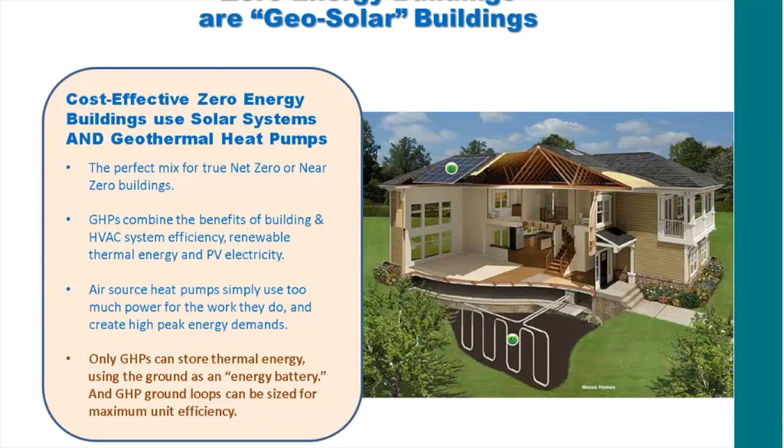So why, if everybody sort of agrees that that's a good vision to have and we ought to strive to get there, why is it so difficult for us to get there? I want to talk about some of the public policy challenges that are preventing us from getting there, and I'll give you some concrete examples of what we've been up against at the state level across the country. So I'm going to break it down into outdated regulatory policies. I'm going to talk about silos of regulation, use of outdated tests and measurements, and the underestimation of peak reduction.

So if you think about us getting to a zero net energy building using geothermal heat pumps, we have to have greater adoption of our technology. We're too small, we're too nascent at this point. We don't have large economies of scale to drive down costs. We don't have great adoption. So we're still considered sort of the fringe technology. And if we can get rid of some of these barriers and have greater adoption, greater penetration into the market, and greater consumer awareness about our technology and how great it is, we think we'll be on our road to getting to where we want to be. But we've got these barriers that we were up against in a lot of different states.

So we still have the old regulatory paradigm of we regulate natural gas companies and we regulate electric companies. We don't regulate energy companies. And the classic example I give is that I live in Illinois, and in Illinois, geothermal heat pumps are not considered efficient. So I went to the chairman of the Public Utility Commission and I said, with all due respect, Mr. Chairman, why aren't geothermal heat pumps considered efficient? And he looked at me and said, I don't know. And I said, well, if you don't know, who does? And he said, well, you should talk to the general manager of the commission.

So I went to him. He's a friend of mine. I said, John, why aren't we considered energy efficient? He said, it's the way the law's written. So I said, can you give me the citation? So we looked at the law, and the law said energy efficiency is the reduction of electricity or natural gas. Well, since we increase electricity in the winter modestly, we weren't getting the energy efficiency savings for heating or domestic hot water. And we couldn't pass an old test, a total resource cost test, to determine whether utilities could promote our technology as being efficient. So I said, okay, now I know what I have to do.

I have to hire a lobbyist, work a legislative session, introduce a bill, get it passed that basically redefines the definition of energy efficiency. And we did something really radical. We defined energy efficiency as the reduction of total energy consumed expressed in BTUs for an end use. Revolutionary, right? Energy efficiency is using less energy. It's not using less therms of gas, and it's not using less kilowatt hours of electricity. It's reducing the energy consumption for an end use.

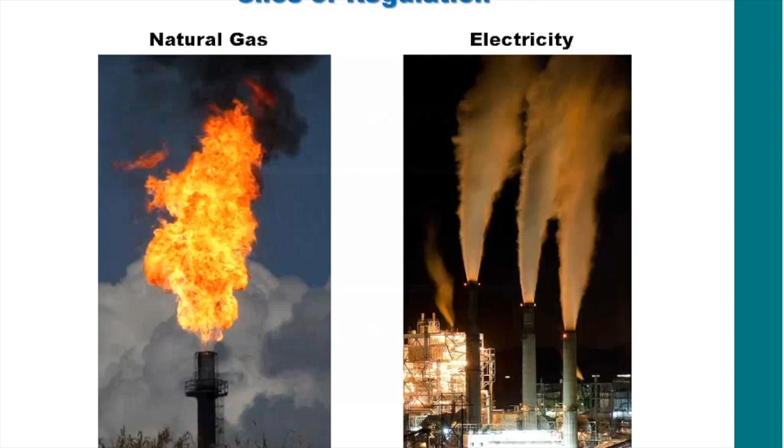So the end result is, for the first time in the history of Commonwealth Edison, fairly large electric utility in northern Illinois that serves 3.8 million people, for the first time in the history of their company, this fall they're going to announce a geothermal residential heat pump rebate program. It took me 3 years to get there. And that's what I call an outdated regulatory policy, that it took 3 years to allow a utility to promote the most efficient way to heat and cool a building.

I talked a little bit, the total resource cost test, it's antiquated. And you think about now the new one is the time-dependent value calculation. We keep coming up with these new tests and measurements, which are very complicated, and the only people who understand them are third-party consultants that run these equations and these algorithms, and it really makes no sense. There's a very simple way to determine whether something's efficient or not, and we go through these mental gymnastics to try to do that. We've talked about lack of societal benefits.

We don't get the true credit for CO2 reduction. And when we go at the state level, we go to the public utility commissions and we say, why don't you give us credit for air quality benefits, CO2 reduction? They go, well, that's an EPA issue. We said, well, no, there's a societal benefit of having better reduction of CO2. Why don't you guys allow us to capture that? No, that's an EPA thing. So again, we have these silos of regulation. And then we don't have indoor air quality. So health benefits for better indoor air quality.

The schools, I give the example, when schools retrofit, and we saw the school in Dougherty, Illinois, when we talked to the principals that put in a geothermal heat pump system, took out the old boiler, and have air conditioning as well as heating, and the energy cost for the entire year is less than what it was just to heat the building, I say, wow, great to have reduction of energy costs. You can put more into computers and pension funds and all that. And they go, no. The biggest benefit we have on the retrofit is a significant reduction of absenteeism by teachers and students. I said, wow, that's significant.

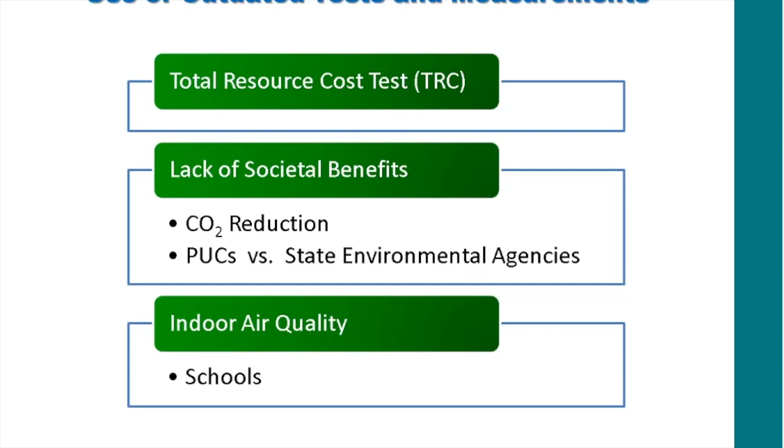He said, yes, it's unbelievable how many times teachers are not sick now and how many times kids are not sick. And I said, wow, that's a real benefit. He goes, no, well, if we have less substitute teachers and we have kids in school more often than not, what happens? Higher test scores. So my new slogan is, make your kids smarter, put in a geothermal heat pump.

So this is the new barrier, and we're coming up against this in dozens of states where, when energy efficiency portfolio standards were put in place through law, they were given to the Public Utility Commission to have the oversight of those energy efficiency programs. What legislatures typically didn't do was give the Public Utility Commission headcount to manage these programs. So again, I use the Illinois example. We have a $240 million annual energy efficiency program for the utilities. Well, its management and the regulatory oversight that's put on those programs are basically run by third-party consultants.

And we have found time and time again where these third-party consultants that are driving these programs, whether what works and what doesn't work and what they're pushing the utilities to do, doesn't include geothermal heat pumps. And you start looking at some of their past papers and some of the studies they've done, they have a clear bias against geothermal heat pumps. For what reason, I don't know. I might have an idea that it might have something to do with the little blue flame, but I'm not going to go there. But nevertheless, we're finding that there is a distinct bias in a lot of states that use third-party consultants to oversee the energy efficiency programs.

So one of the things that drives me absolutely crazy is the continued use of this term fuel switching. And when they say fuel switching, well, you're taking out a fossil fuel furnace and you're putting in an electric heat pump. That's fuel switching. I said, no, that's not really fuel switching. Fuel switching was a term back in the 80s when you took out a propane furnace and you put in a natural gas furnace, or you took out an electric furnace and you put in a natural gas furnace. None of those could be more than 100% efficient. So you were actually just fuel switching.

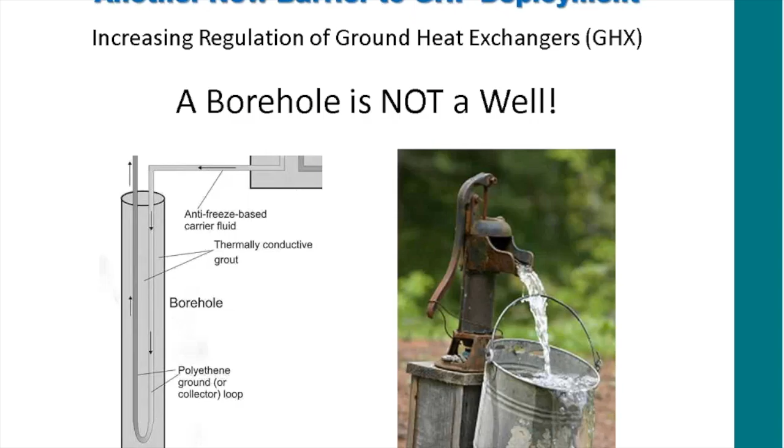So we talked a little bit about this. I always say when Paul Bony goes ahead of me, it's always a testament of how many of my slides he uses, of how great I'm doing. So there'll be a couple, 2 of my 14 slides Paul already had.

But this underestimation of peak, I just want to reinforce that. I just heard an update on this presentation by Western Farmers. They're a generation and transmission cooperative in Oklahoma. I think they serve 18 or 20 distribution co-ops. They're very large. And they're actually in a growth area, and they did a long-range plan that said, I'm going to have to build a power plant, 30-megawatt power plant. And the management said, no, we're going to get this through energy efficiency as a resource. So go have a geothermal heat pump and an air source heat pump program to lower peak.

And so they did a little demonstration program where they sub-metered some geothermal heat pumps and some air source heat pumps. And what they found was that at super peak, which is now the norm in Oklahoma, is 105 degrees. How does a geothermal heat pump reduce kW demand at 105 degrees? They estimated it would reduce 0.66 kW per ton. And when they sub-metered at 105, it wasn't 0.66, it was 0.65. The air source heat pumps, on the other hand, were rated at 105 degrees to reduce peak per ton 0.33, and it was 0.16.

And they said, whoa, wait a second, we got to redefine our program. We got to promote geothermal heat pumps and not air source heat pumps. But if you looked at the ratings of these machines, the assumption would be that you would get 0.33 of peak reduction for an air source heat pump, and that's not the case.

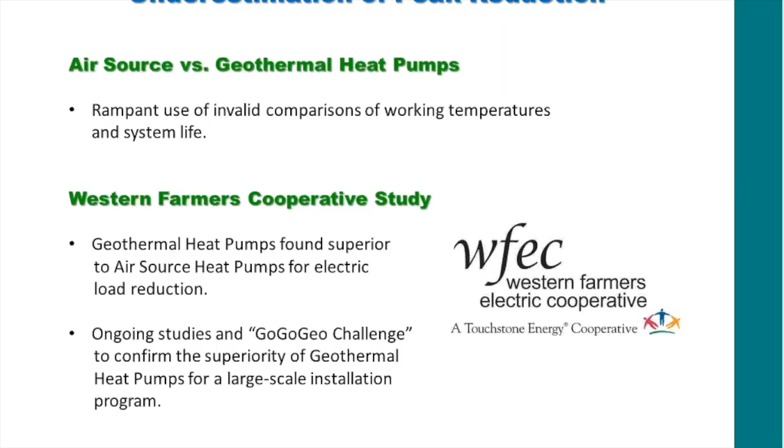So this is Paul's slide. And not only on the cooling side, on the heating side, the COP versus whatever rating the air source heat pump guys are using now. We talked about EER, and now the air source heat pump industry conveniently converted that to SEER, Seasonal Energy Efficiency Ratio, because it made them look better.

So now on the heating side, they're pushing cold climate air source heat pumps. So now they don't express it in COP. The air source heat pump industry expresses it in their new term, the heating seasonal performance factor. What the heck is that? It's COP. You come up with a new thing that totally rigs the rating system to their benefit. So from a national perspective, we need to rethink how we rate equipment, and we're letting it get away from us, and people are using it against our industry.

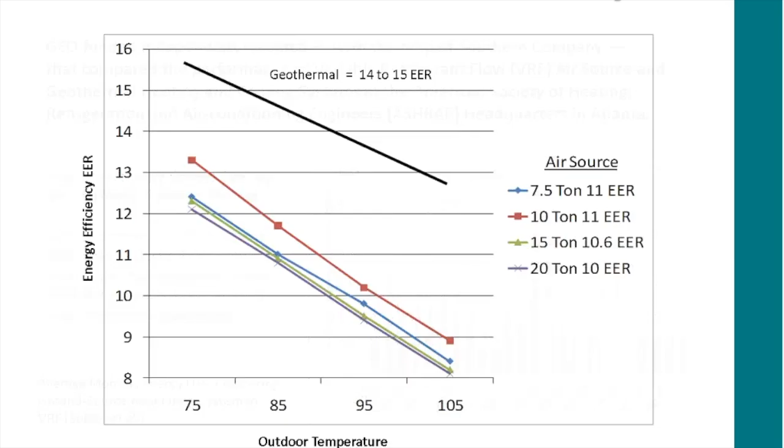VRF, that was a new thing on commercial slides. We've seen this, Paul had this, but this was a $100,000 research program that my association paid for, and we had Oklahoma State University and Oak Ridge National Laboratory spend 2 years looking at the ASHRAE building in Atlanta. Half of that was heated and cooled with a VRF system, and half was heated and cooled with a geothermal heat pump system. They did a 2-year study, and here's the peak reduction.

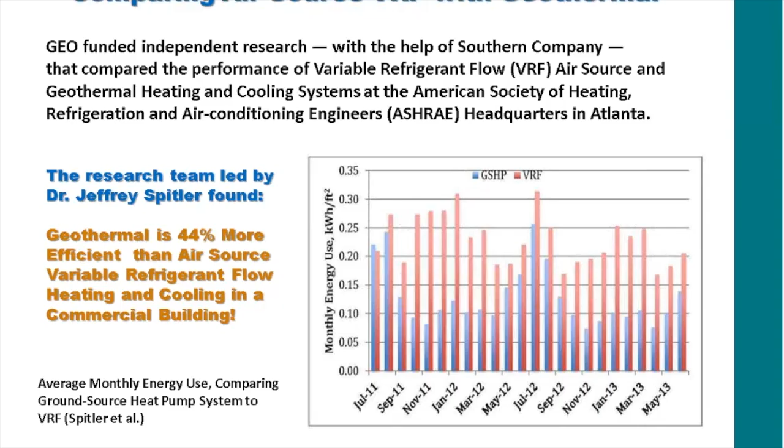You can see, Paul had a slide on that, but geothermal is 44% more efficient than the VRF. And so proof's in the pudding. This is a 2-year scientifically peer-reviewed study comparing apples to apples. And we stand by this, obviously.

This is an old slide, but again, the peak reduction, we have solid evidence that clearly shows how we can reduce peak. This is a Garrett building, 2 identical buildings, one with a traditional HVAC system, the other one with a geothermal heat pump, 35% peak reduction in Oklahoma.

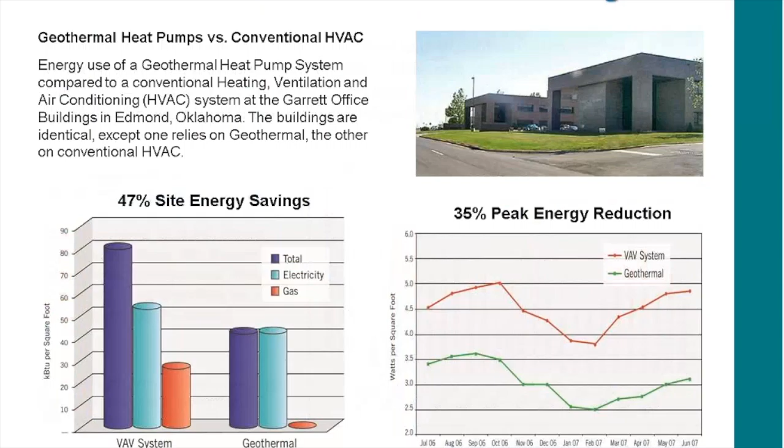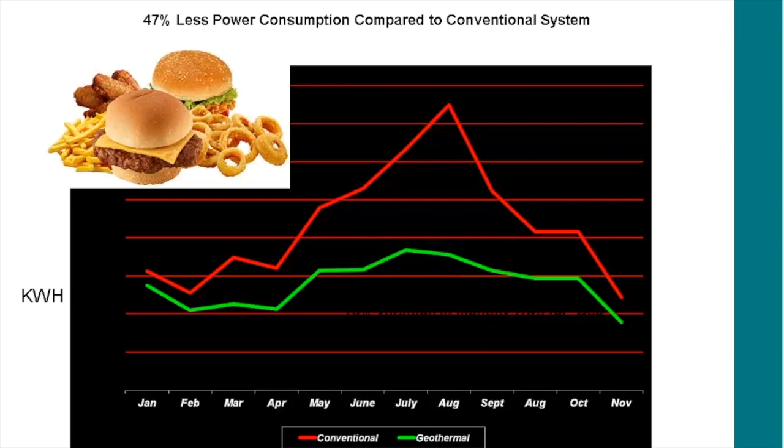This is a franchise in Pensacola, Florida. The franchisee built 2 identical McDonald's. He put one in with a conventional HVAC, he put one in with a geothermal heat pump. There's the difference, sort of like the school slide. So peak reduction is there. We don't get enough credit for what we do for peak reduction.

So what are we trying to do in terms of renewable? We've tried for 3 years to get into the legislative definition, the federal government's definition of clean energy. Because clean energy in the existing federal statute is defined as renewable generated by, and unless we can put in the subphrase that says, or thermal energy avoided by a geothermal heat pump, we're not considered renewable. So as Lisa said, are we renewable, are we efficient? We're both. We're very efficient because we have a renewable aspect to our technology.

So after 3 years of trying to do this legislatively, the president did it in 1 day. He issued an executive order in March, just last month, that said geothermal heat pumps are a form of renewable energy. And so now we are going back to the legislature, and April 30th, there's a bill before the Senate Energy Committee where we're asking for an amendment that would legislatively sync up the definition that's in the executive order with the legislative definition.

Now, why is this important? Well, it will push the federal government to use more of our technology in federal buildings, but almost as important or more importantly, it allows me to go state to state and say, of the 38 states that have renewable energy portfolios, and we're not in it because it doesn't say or avoided by, it says generated by, the federal government defines us as renewable, why don't your state renewable energy portfolio standards define it the same way?